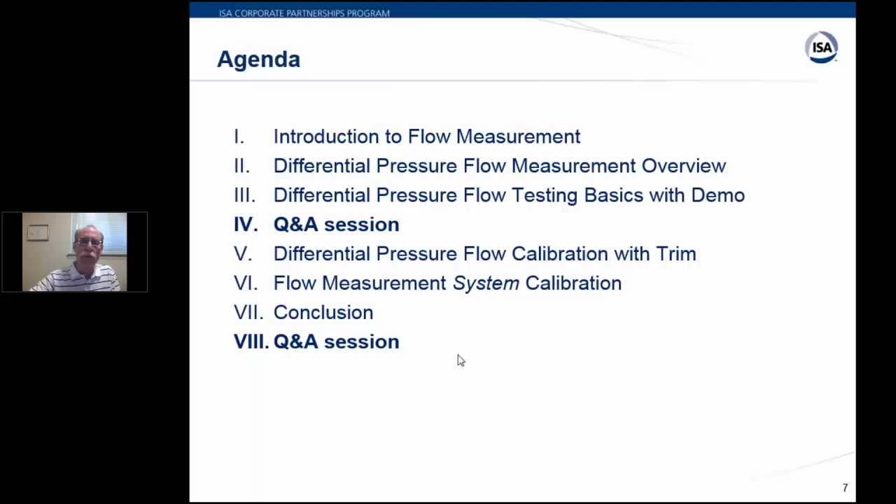So moving along here, there are different types of flow meters that are out there, and these are some of the ones that are used in industry. I've listed them in alphabetical order: differential pressure, magnetic, mass, positive displacement, thermal, turbine, ultrasonic, variable area, vortex shedding, insertion. In other words, there are a lot of them. Not all of them are used extensively in industry, but I'm going to talk about some of them.

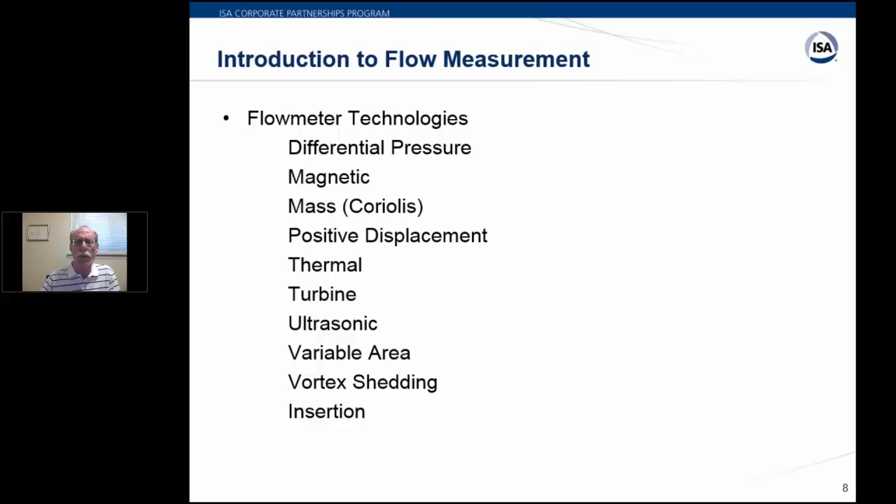And because we want to focus on differential pressure, I'm actually going to do them in reverse alphabetical order, not showing any preferences to any particular technology.

Starting at the bottom there, vortex shedding. Vortex shedding flow meters are kind of like the flagpole when you see the flag waving in the breeze, where the wind blows across the flagpole. It causes vortices to be formed.

You can see here you have flow down here. In this particular case, this is your pipe. This is a bluff body that's in the middle of the pipe, and these are the vortices that are formed downstream. Another analogy in the real world is rivers - you might see rocks in a river, and you might see vortices happening downstream of the rocks.

In a flow meter, if you double the flow through, you actually double the number of vortices that are formed. So it's a linear type of flow meter.

But here's the important thing, and I apologize, I'll say this a few times to try to get the point across: you're not just looking at the flow meter itself, what fits between the two flanges, but the flow measurement system is actually comprised of the upstream piping, the flow meter itself, electronics that hang on the side of it, and also the downstream piping as well. So just looking at one part of it really doesn't do justice to the flow meter, and you're going to see this on other flow meters as I go through them as well.

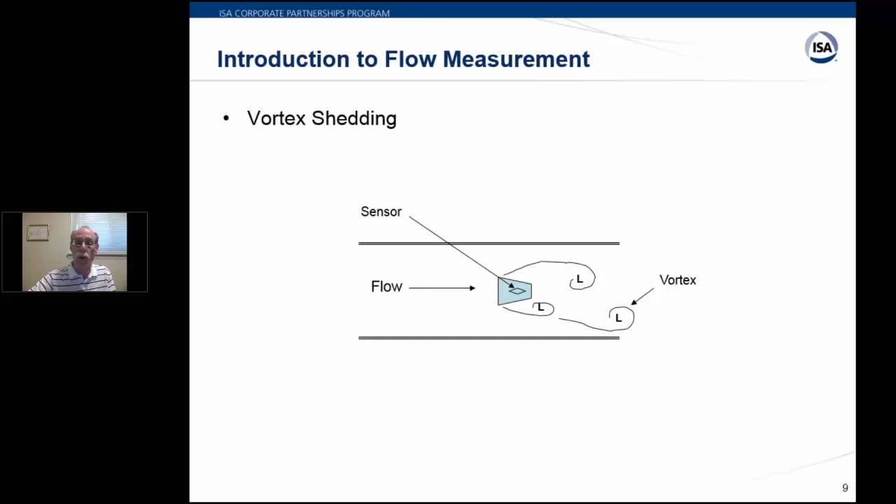So that's one type of flow meter. Another type is ultrasonic. By the way, there are variations on the vortex flow meter in a number of ways. There are variations on ultrasonic, there are variations on the other ones I'm going to talk about, and I'm not going into those at this particular time.

This shows a transit time ultrasonic flow meter. If there's no flow in the pipe, you have an ultrasonic signal that's being sent downstream by this line over here, it's received on the other side, and you figure out how much time it takes to go from one to the other. Then another signal gets sent up here, another ultrasonic pulse gets sent the other way, and you can figure out and measure what time it takes to get there.

If there's no flow, those times should be the same, and the flow will be zero. Now, if there is flow, the signal downstream will tend to be helped by the flow and get there faster. The one on the upstream side will actually tend to slow down a little bit and get there a little bit slower, so you get a time difference. The electronics then come out with what the flow measurement is, or what the velocity measurement is in the pipe.

Again, repeating what I said last time: we have to deal with the upstream straight run, we have to deal with the flow meter itself and the electronics, and we have to deal with the downstream straight run. All of those things can affect the measurement.

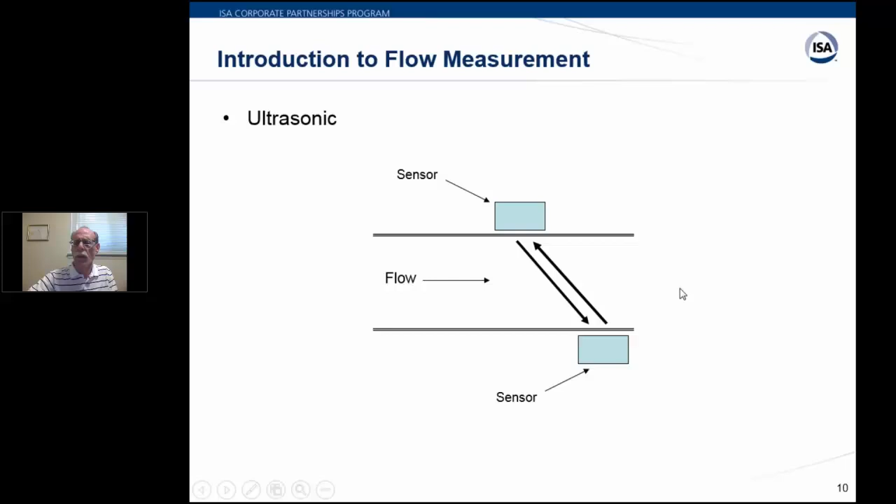Moving along to a turbine flow meter, here what we have is essentially a rotor, like a pinwheel in the breeze, like a little child's toy, but more rugged for industry. The flow comes downstream and hits these blades, and because they're twisted a little bit, they cause the rotor to rotate. A sensor, or sensor and transmitter, determines how fast the rotation is going on and determines what the flow rate is. This is a linear flow meter, so if you get double the flow, you get twice as many rotations of the rotor.

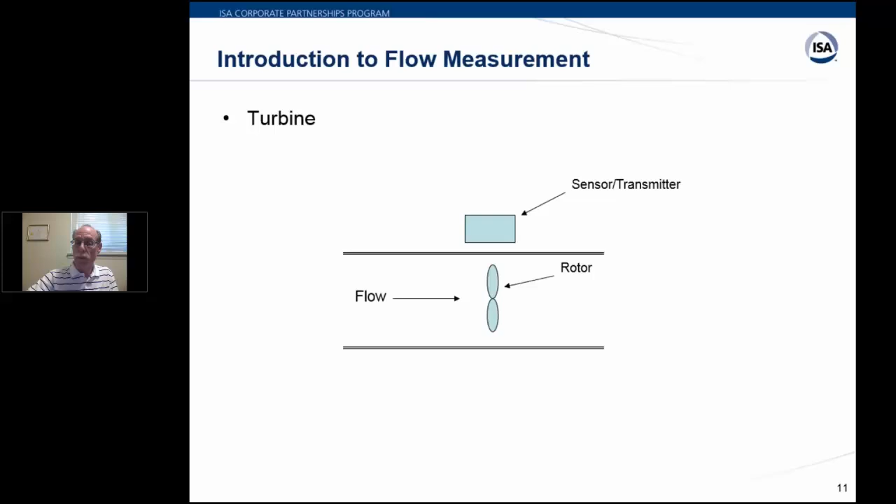So relatively straightforward, but again you have to deal with the upstream straight run, the meter itself, the electronics, and the downstream. And I offer you this: imagine if you had swirl coming into this flow meter. For example, if you have two elbows that are close coupled and out of plane with one another, you'll create swirl. If that swirl is coming in and the rotor is turning in the direction of the swirl, it wants to turn faster. If it's turning in the other direction, it wants to go slower. So you can see how that type of disturbance would tend to affect this particular type of meter.

It's just one example. Another type of meter commonly used is a Coriolis mass flow meter. Here it's measuring the mass. It's not shown here, but in most of these meters the flow actually splits into two tubes, goes around the tube, and then back out the other side and up and out of the meter. The tubes vibrate, and because of the mass moving away from the center of vibration, you get an acceleration. The acceleration and the associated force is in one direction on this side and another direction on that side, and the tube will actually twist. There's a little experiment you can do in your backyard with a garden hose, doing essentially the same thing - hanging it down in a U shape, swinging it back and forth, and turning on the water. You'll see the twist very strongly.

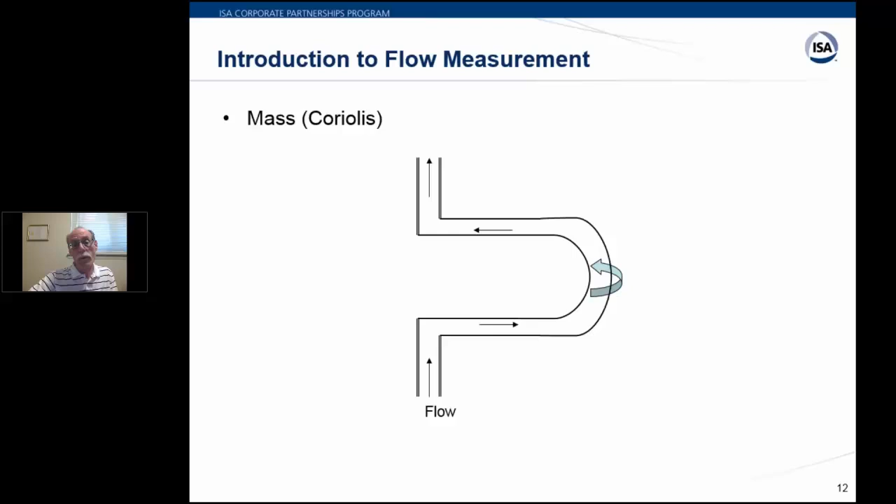Now this particular meter is a mass flow meter, and it splits the flow. It's really kind of insensitive to what happens on the upstream and downstream. However, if you have jetting or something like that where more flow goes through one tube than the other, that probably can cause a problem. It may be an issue, and if it's really extensive, maybe it causes the meter not to even function. So you still have these issues, just not as much as the other ones I mentioned.

Moving along here, magnetic flow meters. This shows a magnetic flow meter diagrammatically, where you have an insulating, non-conductive liner and a magnetic field that's being put across the flow. The liquid has to be conductive, and by pushing the flow through the magnetic field, you create a small micro voltage at these two electrodes, which is then determined. From that you can determine what the flow is. This is a linear type of flow meter.

You double the flow, you get twice as many microvolts across the electrode.

Now, one practical consideration you may see in these diagrams: the electrode shown on the top and shown on the bottom. If you're actually installing a meter, you don't do that. Why not? If you install it on the bottom, it can pick up dirt and things like that, which isn't good. And if you install it on top, there could be an air bubble or gas bubble that causes you to lose your circuit and not get a good reading. So if you were really doing this, the electrodes would be in the horizontal plane so you didn't have any of those issues. But these are diagrams, and you can't really show it the way it should be and explain it properly.

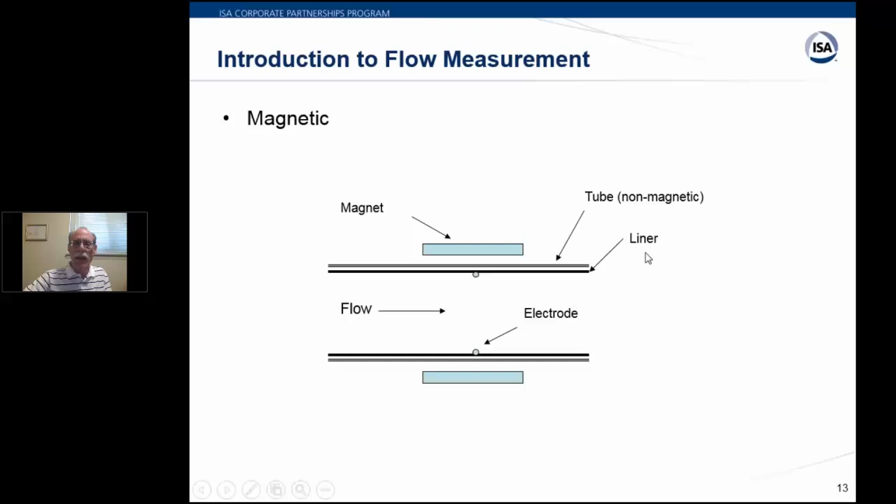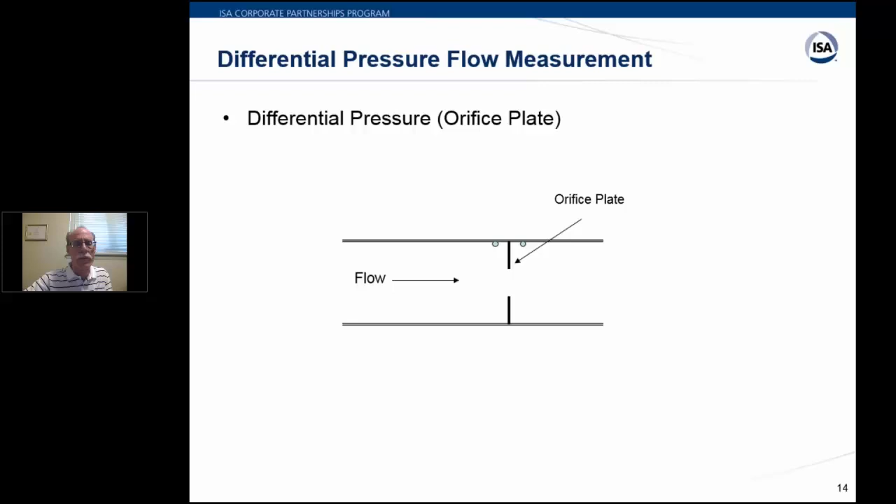Again, same thing - I apologize for being repetitious. You have to deal with the upstream piping, the downstream piping, and the orifice plate itself, the installation, and also the tubing, not shown here, going to the transmitter. That has to be set up properly as well. So a lot of things - these are flow measurement systems, not just flow meters: flow element, flow transmitter. It's really a system.

This is a different geometry called a venturi. It would normally be smooth here, but my drawing skills are kind of limited. Here you see the upstream pressure, and the throat over here is the downstream pressure. So that's the differential pressure you're looking at. These type of meters generally have a lower pressure differential across them than the orifice plate you saw before, which was kind of a real sharp cut of the flow. This is more of a smoother transition in and a smoother transition out.

To give you an idea of why you might do this, it takes energy - pressure drop is energy in a lot of applications. There was one project I was working on some time ago where we had a 180-inch venturi, which was many thousands of horsepower. We were pushing water through that venturi, and taking a large pressure drop such as would be with an orifice plate was just out of the question. You couldn't do it, you couldn't afford to operate - it would be very expensive. So this gives you an idea of a venturi.

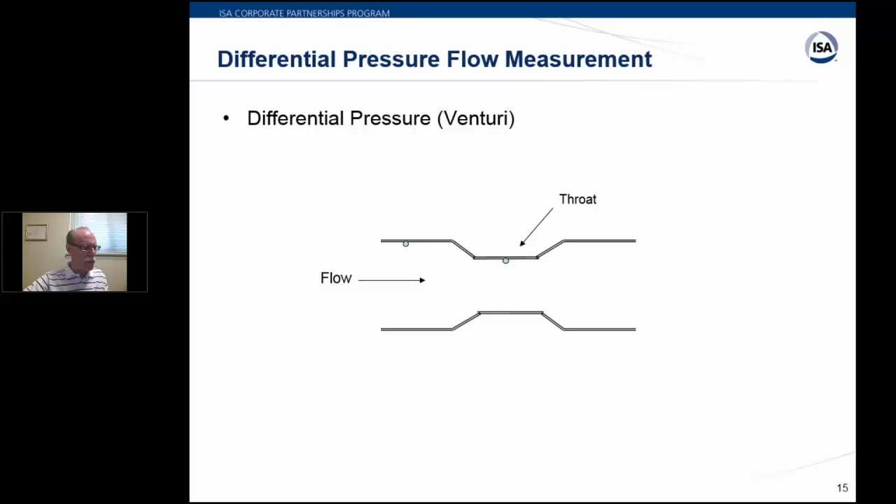Let's see here, moving right along. Kind of a poor man's venturi in a way is a flow nozzle. This is basically a curve that you see here, going all the way around the pipe. You can think of it as an orifice plate where the hole is kind of bent, if you will. The flow comes in and makes its way across here. It has a higher pressure drop than a venturi, but a much lower pressure drop than an orifice plate. This is oftentimes used in steam service.

And again, you have to deal with the upstream straight run, the downstream straight run, and also the condition of the nozzle. Just as a side point, some years ago I was involved with a legal case that involved some nozzles, and I was not able to actually look at the nozzle itself, the internals. And that posed - why not?

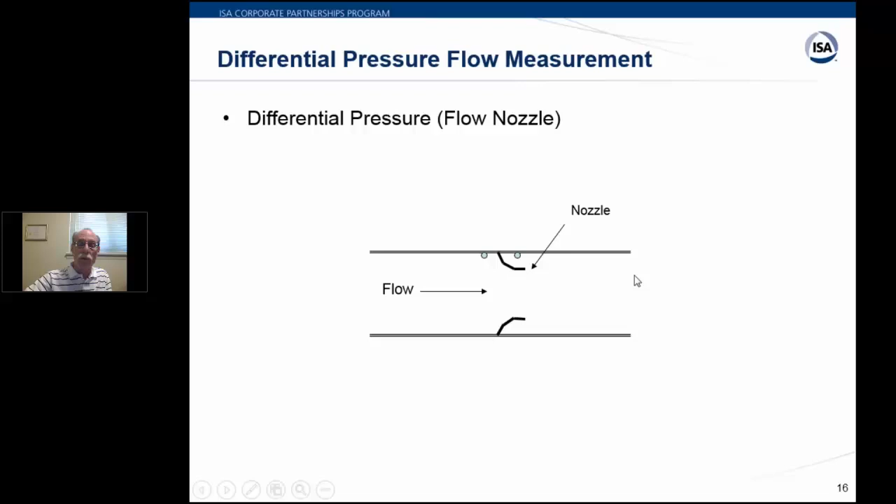Well, it was in steam service at 800 degrees, 800 psi and 800 degrees Fahrenheit, and it had not been taken out in something like 45 or 50 years. Nobody had looked at it. And the transmitters were not that much better off. They had not been calibrated in 7 years because they had mercury in them and nobody would touch them anymore. So I had to actually take a look at this and prove and show, with logic and reason and science, that these meters were actually functioning correctly. So there were other techniques that I used to do that. But, you get an idea of things that you have to consider.

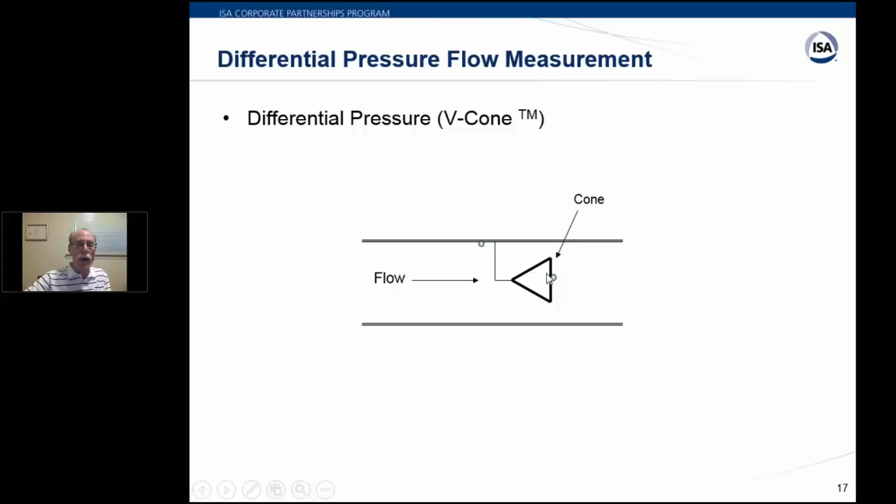This is another shape. It's actually a trademark, a V-cone, which is from McCrometer. Here you've got the flow coming in. There's your upstream tap. And the flow goes around this triangular piece there. It's hollow in the middle, but to the flow stream it sees it as a triangle. And the flow goes through this annular area here, and then the pressure drop is from here over to the upstream tap. So these are just different geometries. There are others as well, and variations on these. So there's quite a lot to it if you so desire.

Now, that being said, some of the common threads I've gone through here are that when you measure flow, you're really looking at a flow measurement system, not a flow element, not a flow transmitter, not some piping. You're looking at everything, the whole thing, in order to be accurate. So here what you have is the upstream straight run that you have to deal with, the flow meter element itself, or this plate or whatever you're using, the differential pressure transmitter, which we're going to talk about more today -- Ned and Roy are going to talk about that -- and also the downstream straight run. And here's key: all the components must be considered to ensure accuracy.

I want to add a little side note. I mentioned that 180-inch venturi. In that particular installation, a tie-in was made with a bypass line. Now catch this, upstream of the upstream straight run -- so upstream of the upstream straight run. It was really kind of far away. But when they turned that bypass on, it affected the flow measurement by 10%. Even though we had not played with the upstream straight run, and there was some piping between where the tie-in was and the upstream straight run, it still affected the flow measurement by 10%. And it was well documented that that was the case.

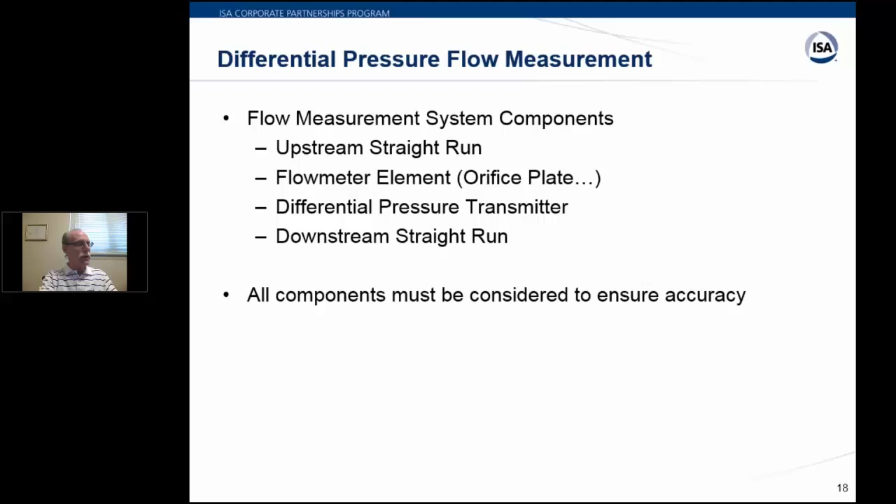So with that, one more slide. What I wanted to say with differential pressure flow measurement is the flow rate is proportional to the square root of the differential pressure produced. Now, what I do is I just memorize one thing to remember that: double the flow, 4 times the differential. So if you have double the flow, 4 times the differential; triple the flow, 9 times the differential; half the flow, 1/4 the differential. So 1/3 of the flow, 1/9 the differential. 1/10 of the flow, 10% flow, 1/100th of the differential. And Ned is going to talk some more about issues concerned with that particular aspect of it.

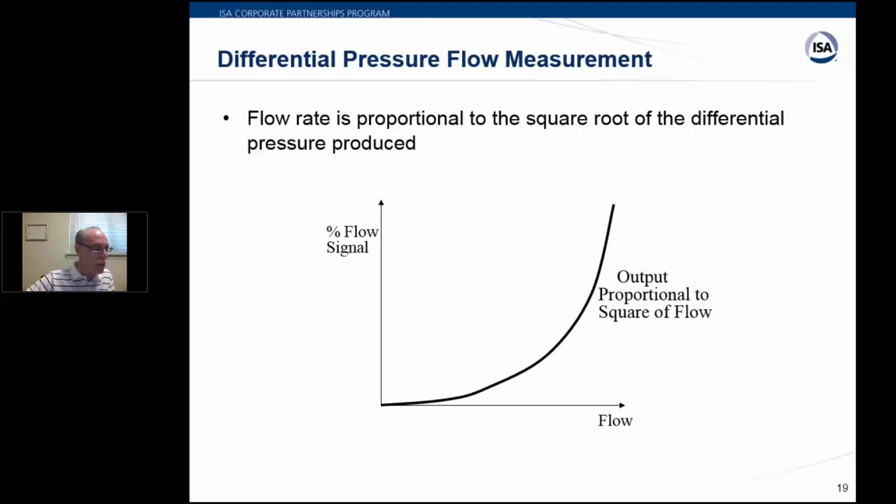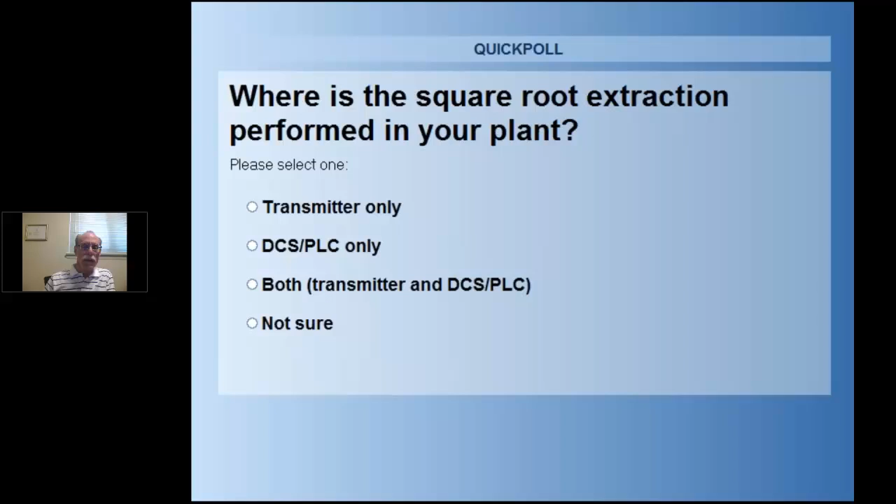So what I want you to do here is we have a little survey question. Where do you take the square root extraction? Do you take it in the transmitter, the DCS, the PLC, or both of them? Not sure -- and no one's looking over your shoulder to see the answers. There is no really right answer, but there certainly is a wrong answer. And the wrong answer is if you do it both at the transmitter and in the DCS or your PLC, because then you're not taking the square root, you're taking the fourth root essentially -- the square root twice.

So what I'd like to do is, for all the questions, I want you to put down what you do. And I see the results here. You can also see about half of you do it in the transmitter only, half of you do it in the DCS or PLC. And these two, you can make arguments for either one -- neither one is incorrect, they're both correct. But when you do it in both of them, that's about 20% of people. I guess this follows the 80-20 rule. If you do it in both of them, that can pose a problem because you're not going to get the correct measurement.

As a side note, some years ago I actually did it in both in one particular application, because it looked like it was not being done in the other location, so I did it. Then I found out it actually was being done, so I undid it. We ended up correct, but you can sometimes stumble into something because it's a setup for you.

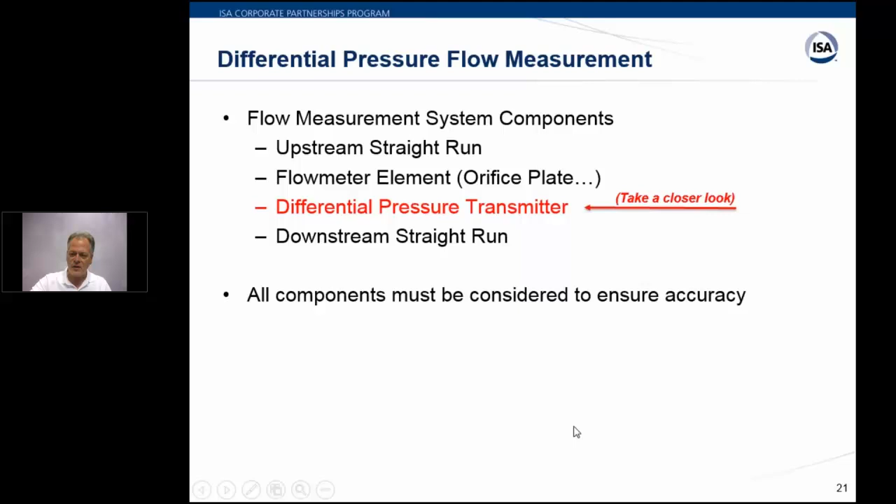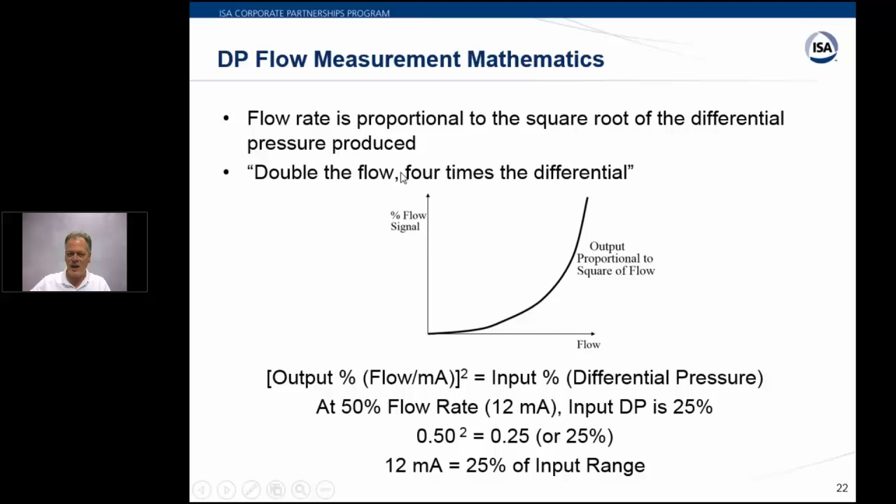Let's look at this low range. A lot of people use the term low flow cutoff. Typically in the DCS, when the meter drops below 5.6 milliamps, which is 10% flow rate, it just assumes the flow becomes zero, because look how fast it changes. As you start at 0, it runs to 5, 5.6 milliamps very quickly with just a very small change in pressure.

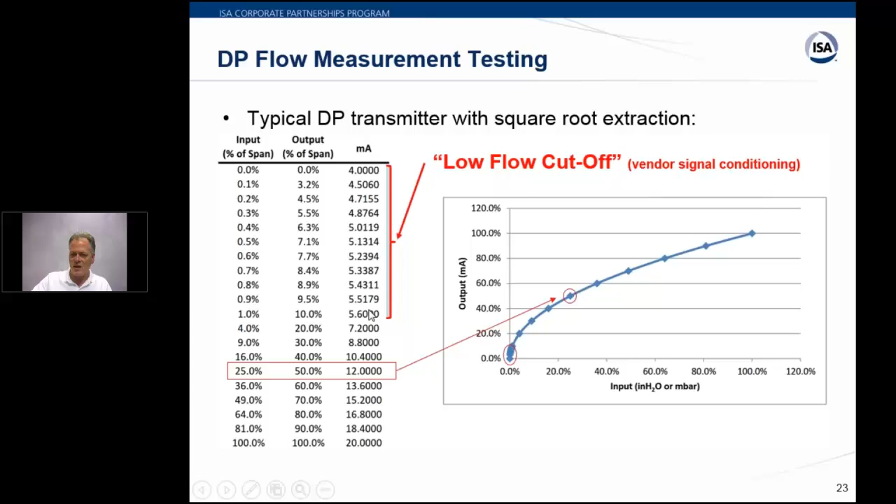So you can see, as Dave mentioned, just a 1% change in the pressure causes the output to move 10%. So when you're looking at a transmitter, this is very difficult to work with. And if your DCS is cutting this signal off anyway, it's wasted effort to test below this level. So Roy is going to be demonstrating that. Roy, if you come in here, let's see if we can show this to the audience.

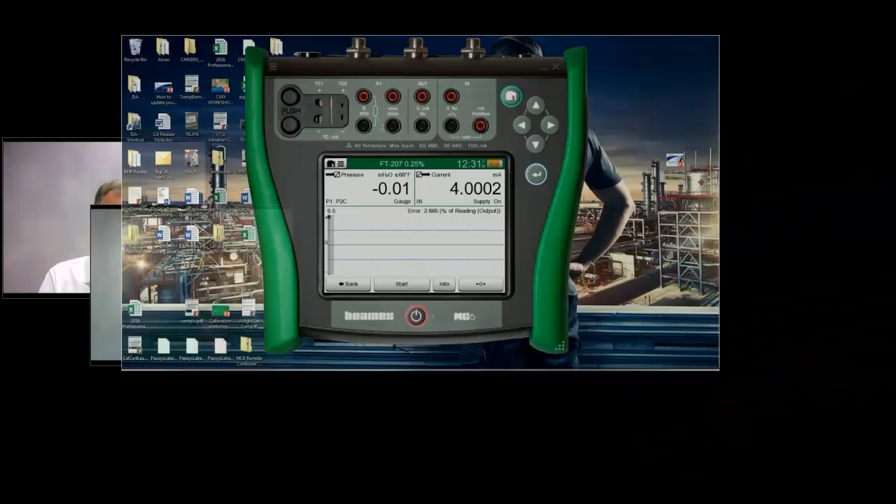All right, sure thing. So just so everybody knows what I'm using here, I've got a calibrator and I have a differential pressure transmitter. I wanted you to see that I'm actually using real gear - I don't have a simulator going on. Once I hit this, now you can actually see my screen. You should be able to see the MC6 itself. What I'll do is I'll show you...

I'm sorry, hello? Yeah, I'm on a webinar right now. I'm on it. Yeah, can I call you back? All right, cosine is adjacent over hypotenuse. All right, I got to go. I love you too. All right, bye. I'm really sorry, that was my mom.

What we want to show is the transmitter itself. Since it's square root, we want to stay away from zero. I have a pressure pump here. Let me go ahead and start adding some pressure. You might notice that when I'm at zero, let me take it off of a vacuum. When I'm at zero, I'm actually seeing a cutoff—I'm seeing 4 milliamps out.

But if I pull this up to what Ned was saying, to just 1% of my input—1% of 207 inches, which is my span, is 2.07 inches—so if I get close to that, now I'm seeing about 5.6 milliamps, and this is where we want to start the test of our pressure transmitter.

That's the whole point of what Ned is saying here: if I go back and don't hit this 1%, you're going to see this thing jumping all over the place. Actually, it's even off the graph now, jumping around—it's off the screen on the error, so it's just meaningless.

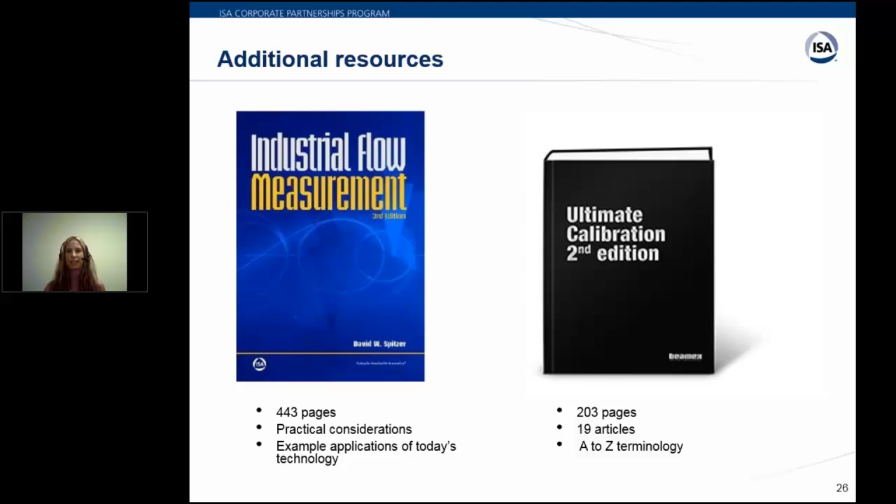All right, Roy, thanks a lot. So now we're going to get down a little bit deeper. We just showed you the noise at the low end, and let's get a little more specific on how we recommend you should test a DP flow transmitter.

If you're a calibration professional, you're used to testing at 0, 25, 50, 75, and 100%. And when everything's linear, you don't even think about it. But remember our slides, we're dealing with square root mathematics. Since we're trying to measure flow, it makes sense to focus on the milliamp output.

So you really should be testing at 25% of flow rate, 50%, 75, and 100. Also, we brought in this concept of the low flow cutoff. So instead of testing at 0, we're recommending you test at 10% of output—5.6 milliamps, then 8, then 12, 16, and 20. It's a little different than what you're used to on a linear transmitter.

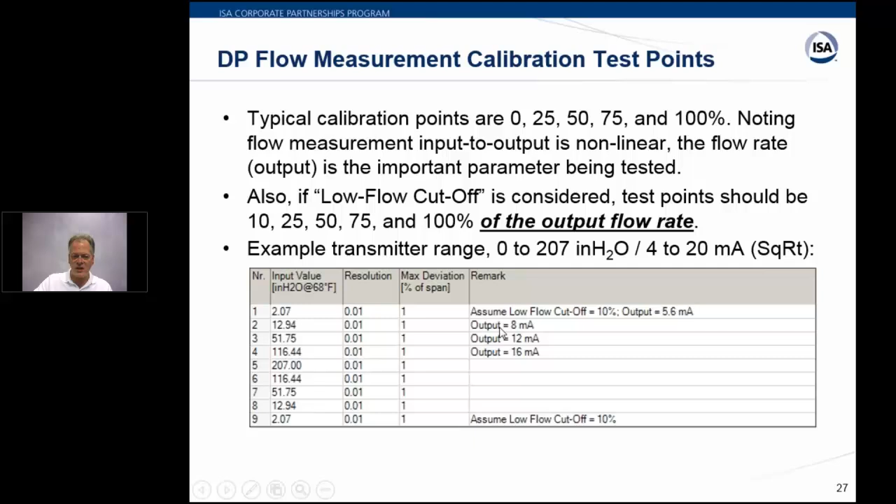So here's what I'm talking about: we're checking at 10%, then 8 milliamps, 12 milliamps, 16 milliamps. We've backed into, in essence, the pressure required for those test points. The pressures are very odd with this range of transmitter, but if you dial in these pressures, you're going to see nice, even milliamps.

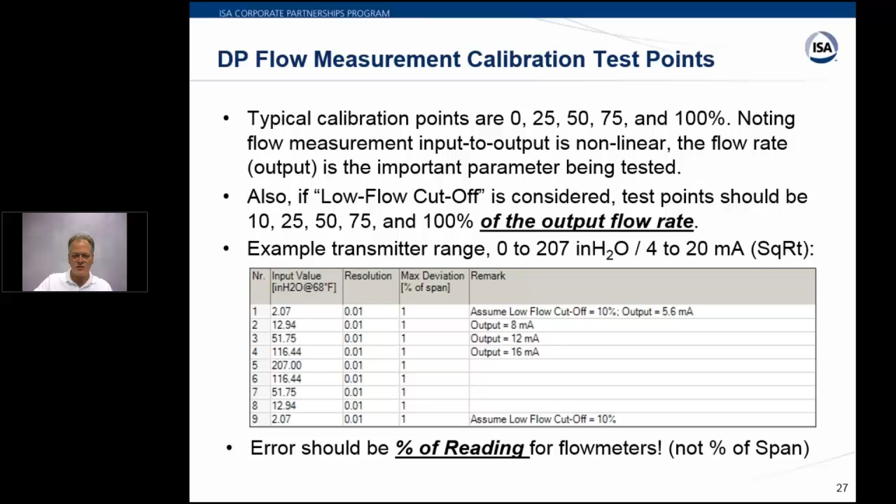And then finally, when you look at the error, people are used to using percent of span. But for flow, we recommend you use a percent of reading type analysis, not percent of span.

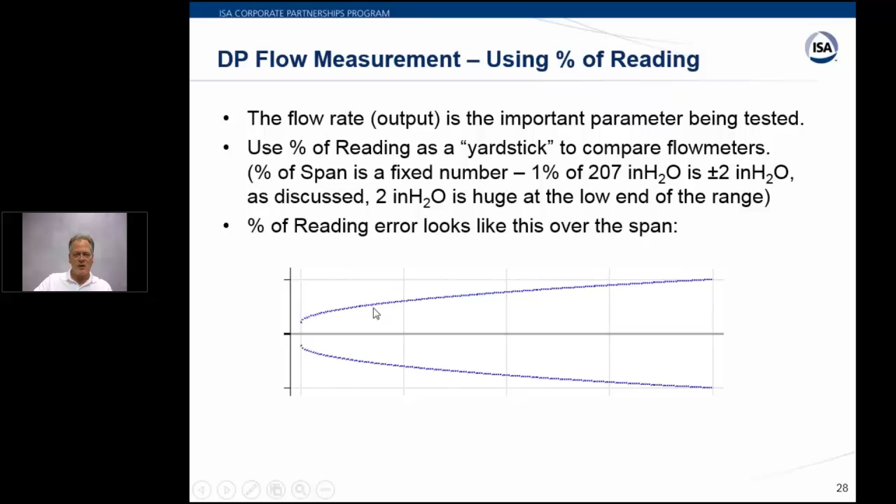So to summarize, you need to understand the math—that the differential pressure is going to be the square of the milliamp range. Consider that there's low flow cutoff going on, and it's really a waste of time, or just not good data, to test below 10% of the flow or 1% of the pressure range of the transmitter.

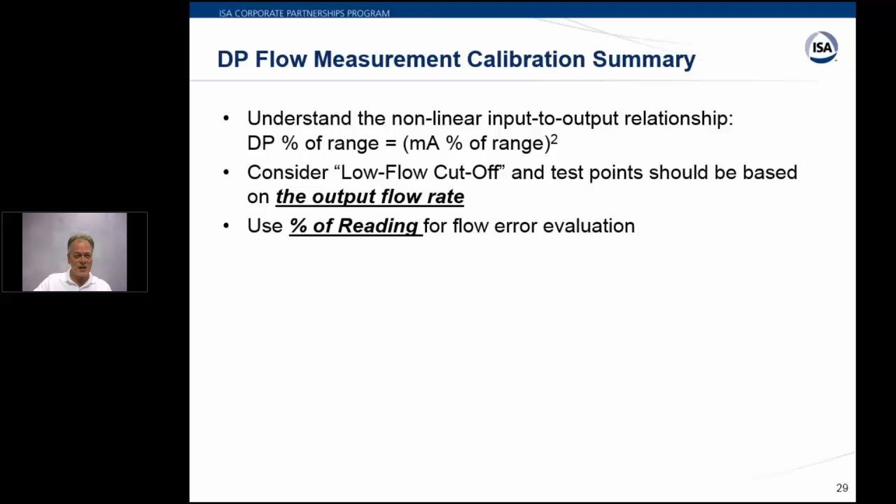So with that, I'm going to turn it over to Roy and let him show you what I'm talking about.

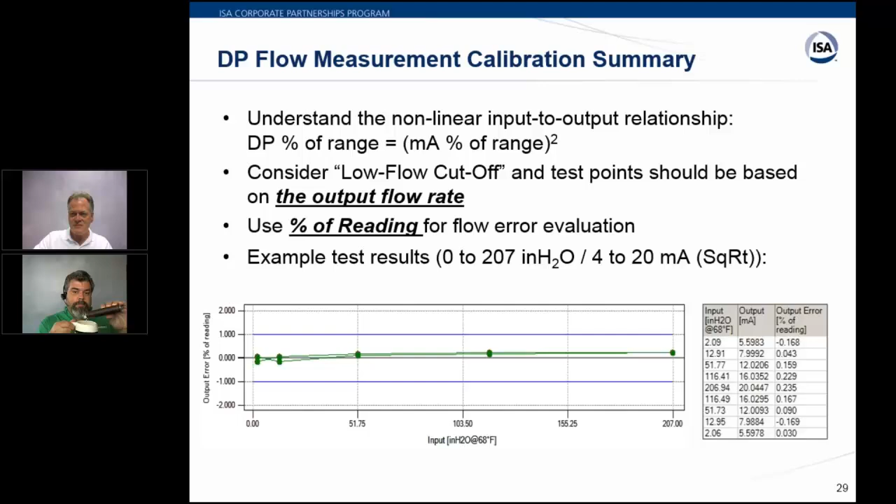Yeah, just a minute. Don't turn my video on yet. My camera, what? Hey, this is not what it looks like, I am telling you. Let me get my calibrate—just, I don't want to spill. Roy, we talked about that.

Yeah, sorry. So we're going to calibrate a DP, differential pressure transmitter. We wanted to do a 5 up-down test strategy, but for the sake of time, it's not enough, so we're doing a 5 up by itself.

On the calibrator, my first test point is 1% of my span. So 207—you just move the decimal point 2 places over, and we have 2.07. Let me hit start here. I have a 2-second delay, which is pretty quick.

My next test point for 25% is right here in the gray, and I can use my fine-tuning knob if I want, or just get into the gray area. Look on the bottom right—that's where I'm supposed to be.

So now for 12 milliamp output, and so the flow output, because we're calibrating the transmitter itself, we have to deal with the output of the transmitter, which is 4 to 20 milliamps.

I've converted my... I actually jumped past it too quick. Let me go ahead and vent this and approach it again from the bottom. I don't want to vent down onto it. Let me just back down. Here we go. Otherwise I'll erase any hysteresis that was in there, so I'll approach it from the bottom.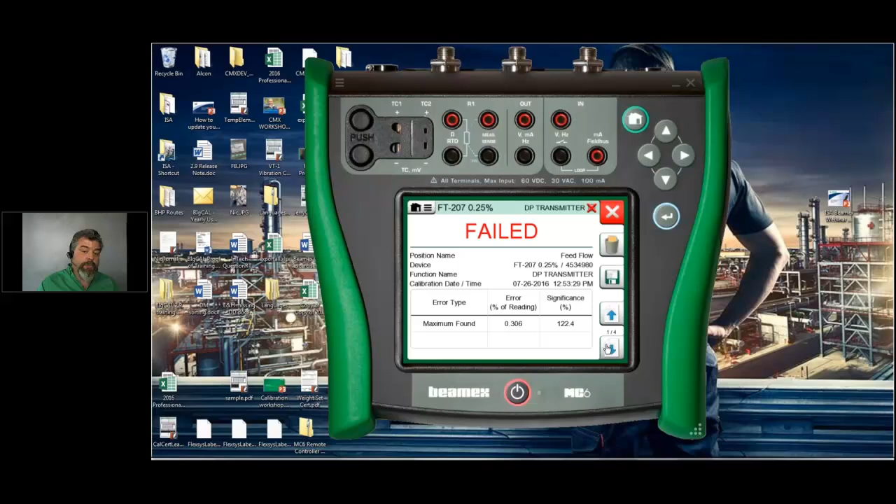This thing failed, and I'll use the mouse so you can see where I'm clicking, but you know that I'm using an actual calibrator, and your calibrator might be a different color as well. As long as it can do a calculation of that input and a square root calculation against the output, then you can do this test.

I can put in notes here, so let me put notes. You know what, I'm not going to put a note here on this as found.

Here's my graph. The blue lines represent the tolerance. So the 0 across the middle is perfect, and we can see that our very first test point failed.

I want to see the numbers. Okay, here we go. My very first one was 0.306% of reading out. Everything else was in tolerance, but I need to do an adjustment.

Now, as a tech, do I delete this and trim it and not tell anyone? No. You want to save this as ugly as it is, because this will give you trending information. So let me save this. I want to save it as found.

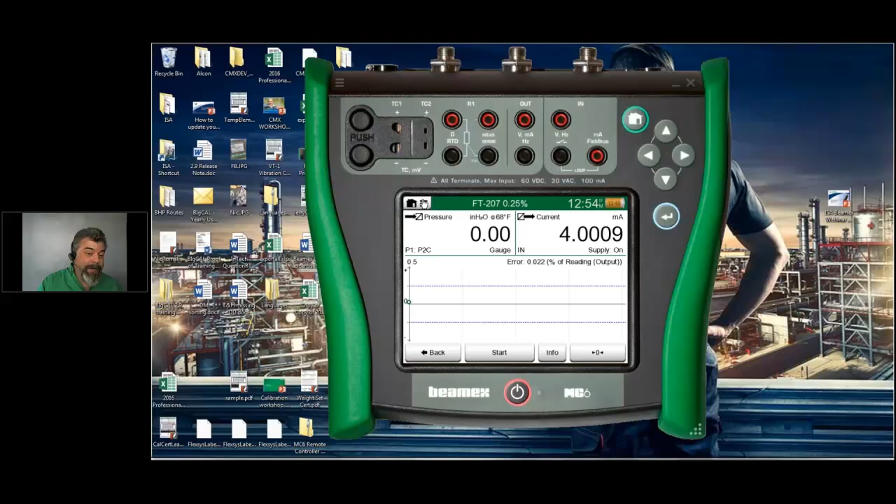Now I'm back to the beginning. Let me vent off my pressure pump, and I need to hit the secret button. There's a secret button on this calibrator, and it's right here in the top left, and don't tell anybody.

Secret button, start communicator. It actually has an official name, which is menu button, but I like secret button way better. We're starting the HART communicator. This is a HART transmitter. If this were Fieldbus or Profibus, it would be exactly the same thing. Just start the communicator, because we can't do an adjustment with a screwdriver or a crescent wrench. If it's a smart device, we have to fire up the communicator and do the adjustments that way.

So this does take a little bit of time to connect, and it always takes longer when people are watching you. I don't know why that is.

So here it is. Let me click online, and this it is a Rosemount 3051C, so that'll be under Service Tools, then I want Maintenance, and if your transmitter is a different color, this menu structure will be different also. So here's Analog Calibration. That's the digital to analog adjustment on the output of the transmitter.

What I want to do is look at the input side, so we'll go to Pressure Calibration, and you see upper, lower, and zero. Zero we don't want to do here. Zero is what you do when you install the transmitter. But I want to run the lower method. I always run the lower first and then the upper.

Warning: loop should be removed from automatic control. It is. It's sitting on my desk, so it's not being controlled.

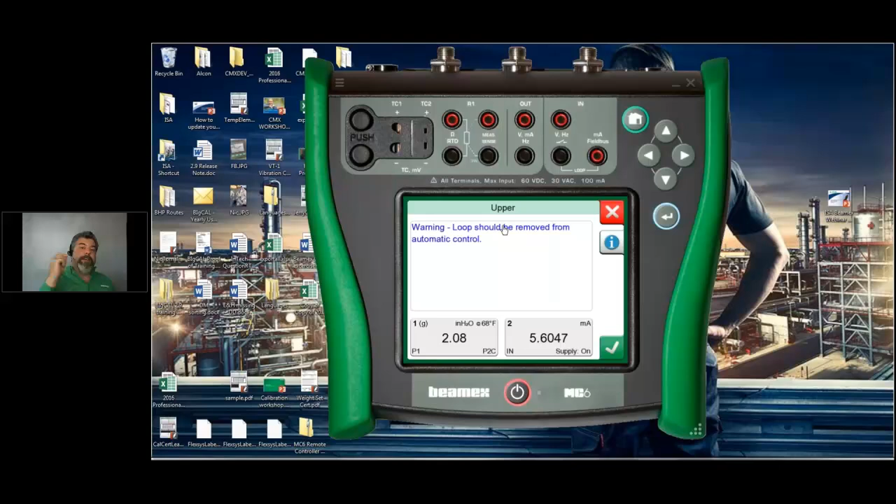We need to go to upper. Let me hit check. So to back up a second, we're adjusting the lower range of this transmitter and the upper range. We're adjusting these individually. I just trimmed the lower, and now we need to make an adjustment on the upper so we have this range of 0 to 207 inches. Let me hit check here. So now it says apply pressure, and I'll hit check, fine.

And let me take this up to 207. Should I make it look like this is more difficult, or just, no? Okay, so we're coming up. I can do the rest of it through the fine-tune knob.

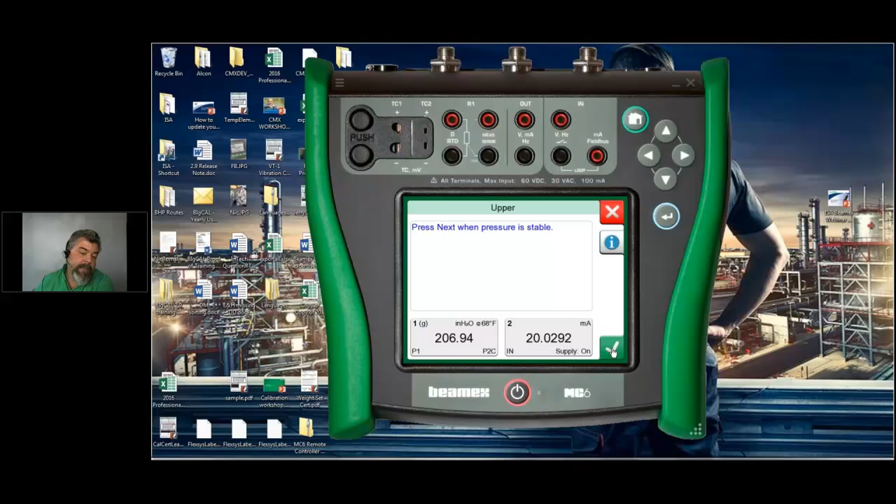Again, let me just set this down because I don't want my hands to shake or move the pressure hose to have an adverse effect. So I'm letting it sit here. It's coming down a little bit, and I'm watching this. It'll take a little bit to stabilize, and I may even rush this for the sake of time. But let me just pull it up again here. I know that I've already tested this - if I let it sit there for a minute or maybe even a couple minutes, it'll sit rock solid and I won't have to worry about the pressure falling.

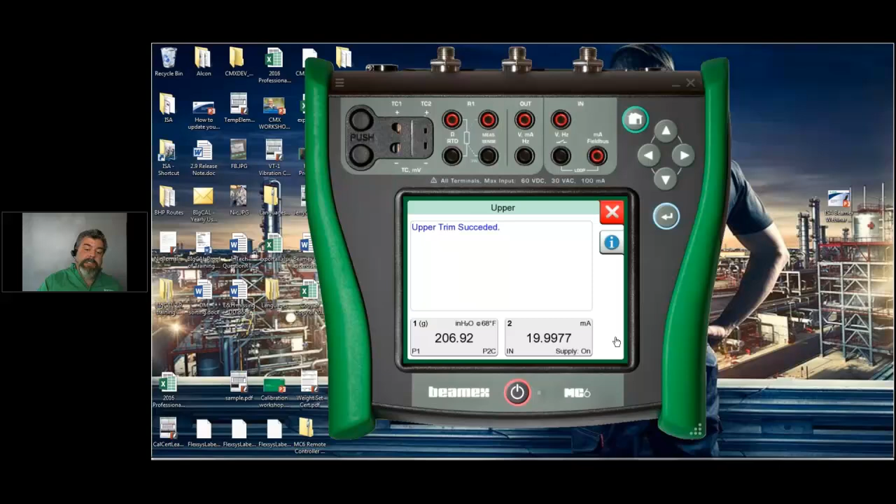But you know the deal if you're in a hurry, so I'm going to force it right here. Grab this, tell it I'm putting in 207. You should watch the output. So it was 20.03 and now it's readjusted itself to 20 milliamps. We're pretty darn close. So it says remove pressure. Let me hit check. Upper trim succeeded. Now it's finishing up the processing on the transmitter itself, and now it's done. Wow, that was quick. So let me hit X.

What have we done? We've just done a lower trim at our 2.07 and our upper trim at 207. So now we should see - you can see our test point right now on the right side. Our span on the top is actually great. Let me just vent the pump.

And before I hit start, you can see it's jumping all over the place. That's part of why we don't even try anything lower than 1% on the input. So I'll close the vent on my pump, and let me take this up to 2.07 as a starting point.

Do I have to get it exactly on 2.07? No, because we're calculating the output against right now 2.17 or 2.18, so we don't have to get it exact. It'll calculate. Let me hit start. And I have a 2-second delay. All right, I've already grabbed that one. Now I'll put it in the next one.

So what's our next test point? How do we know? The bottom right says 12.94, so I'm looking for 12.94 inches of water. I'm going to not get it exact. All right, I went over a little bit, but I'm still in that gray bar, which is 4% of our target. And we're calculating what our output is - so now we're 8 milliamps out. I'll take it up to 51.75, and I'm just going to get it close.

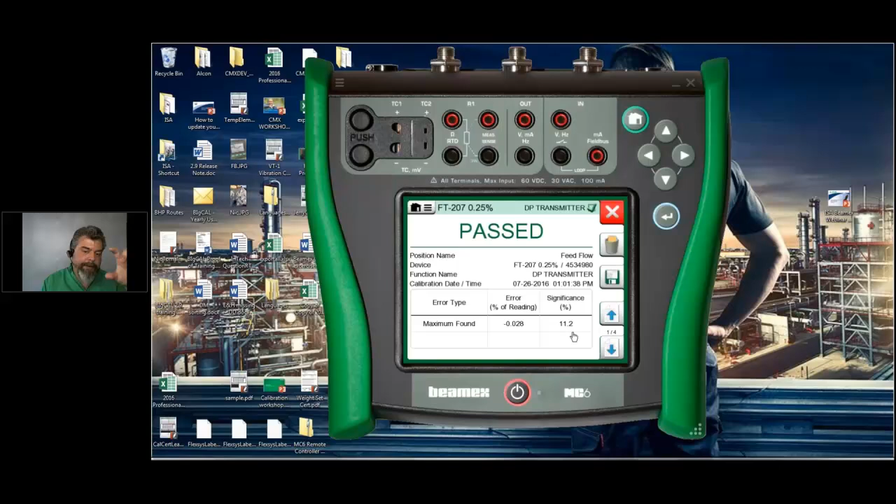So as a reminder, we're doing a trim on this transmitter, and I'm not getting it exactly on 207 because I don't have to. I'll get it close, I'll let it do the math. What do I have? Passed. My largest error was negative 0.028% of reading, which is 11% of our full target allowed, 11% of our 0.25%.

So the notes, I'm just going to put in a note. I'm going to say trimmed. And wait, no, I'm not done yet. Let me hit enter, trimmed. I want a dash. It's always when you're in a hurry you can't find it.

So this is the technician putting this in. This is not me.

Okay, so this is the note that will appear on the calibration certificate. And remember, I did not put that. That was the technician. Here's how we left it, and the numbers. So we don't have to type this down as long as you have a documenting calibrator. That's the whole key. Let me hit save, and I'll save it as left.

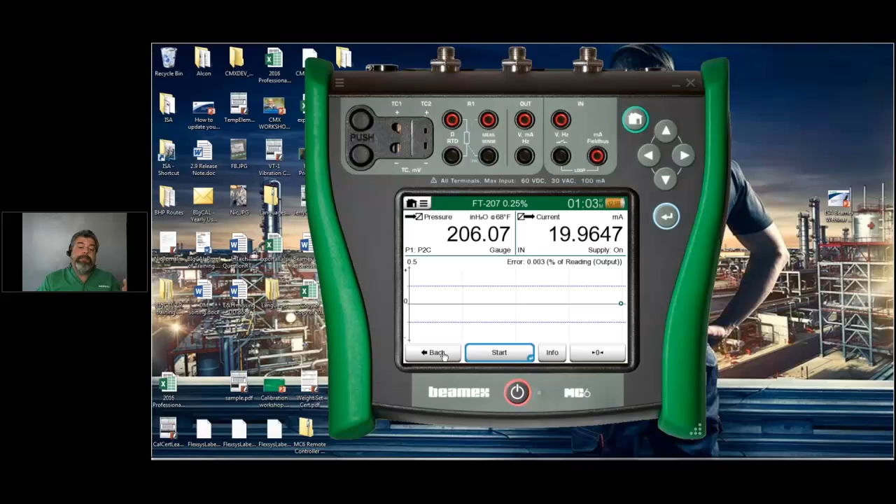Now I'm actually done, but let me hit the back button and show you the before and after. Let me go down to the results. This is how we left it, but if I want to see what it looked like before, let me do show older result. This is the very first result.

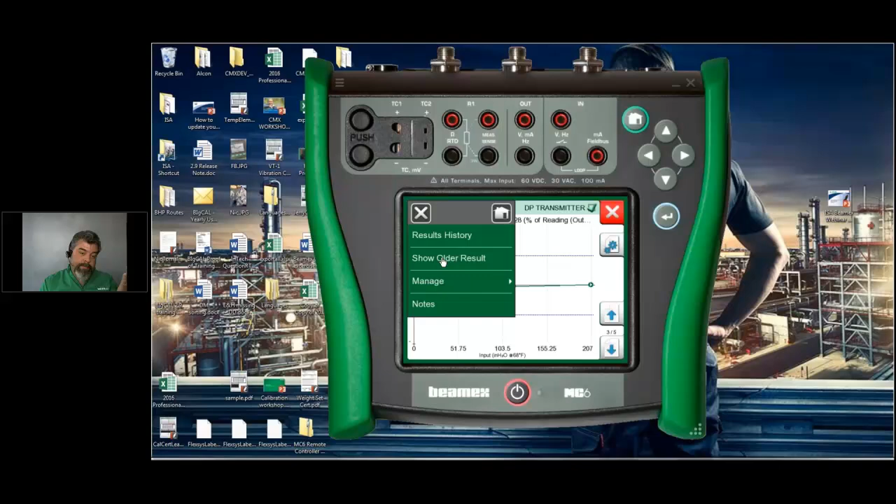I'll go back up to the secret button, show newer result. That's how we left it. One more time. Here's how we found it, and there's how we left it.

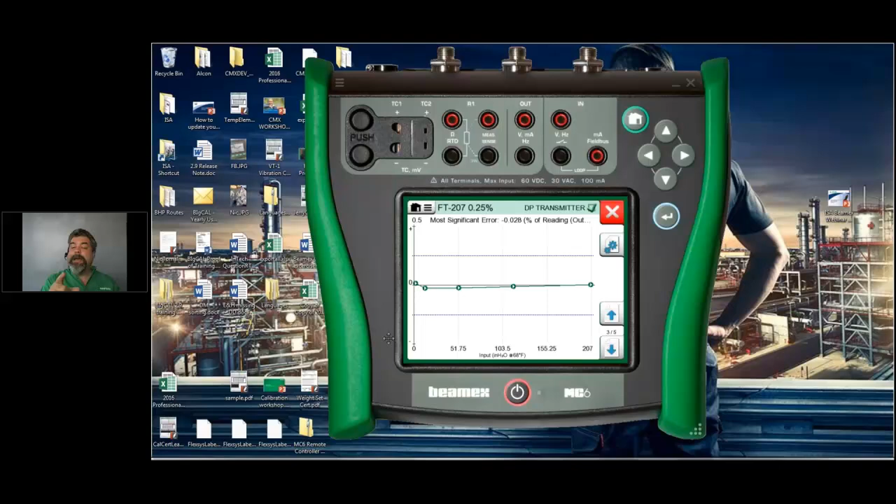So this, I've just done this really quick. This is how you calibrate a pressure transmitter. But David is going to show you coming up that this is not all there is to flow issues. There might be other items in the process that can affect it, and David will show you that, but I'm just showing you how to calibrate the transmitter itself. So with that, I'm going to hand it off.

Okay. Okay, very good. Thank you, Roy.

Let me continue on here, and again, I apologize that I'm repeating myself, and I'm going to read to some degree, my apologies there. But the accuracy of a flow measurement system is based on the entire flow measurement system, which includes the straight run, flow element, and the transmitter. All of these things have to be operating properly and done properly in order for the system to operate properly.

And now the flow measurement system, think about that for a second. If you want to calibrate the entire flow measurement system, you should be calibrating the entire measurement system. Okay, so a calibration really is a calibration of the entire system.

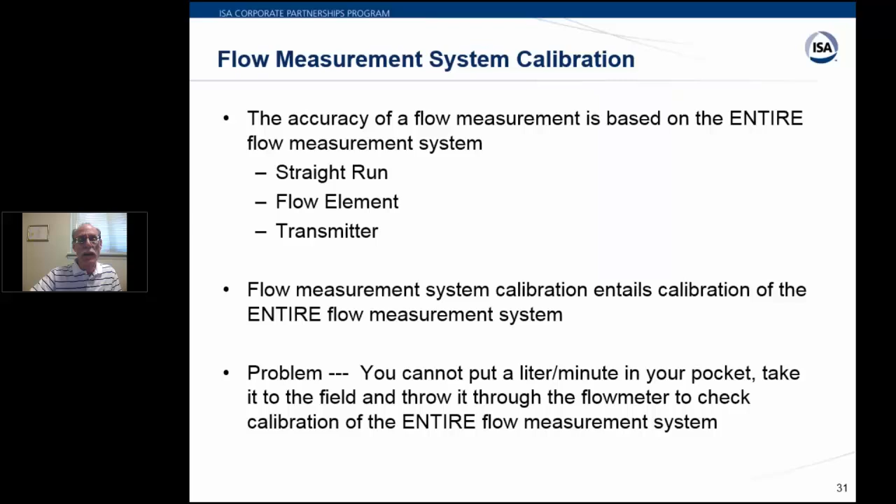The problem is you can't take a liter per minute, or if you're in the United States, a gallon per minute, of liquid or gas, and put it in your pocket, take it out to the field, throw it through the flow meter, and check and see that the flow meter read 1 liter per minute. Flow measurement is a dynamic measurement. It's not a static one like pressure, temperature, or level. It's dynamic, in liters per minute, cubic feet per minute, gallons per minute, whatever it is. There's time and there's a mass or a volume associated with it. So that's why flow measurement can become a bit of a problem.

I have a question for you here. You can just answer yes or no, no right or wrong on this. Do you know what a flow laboratory is? Basically, as you're answering, I'll talk to that. A flow laboratory is a facility where it is able to measure the flow going through a meter under test, the meter that you want to know if it's okay or not, very accurately. When you're talking very accurately, it might be 0.05%, 0.1%.

Okay, so 2/3 of you know what a flow laboratory is. That's good, that's great. I'm not picking on the 37% here, but a lot of people out there in the industry have never heard of that before.

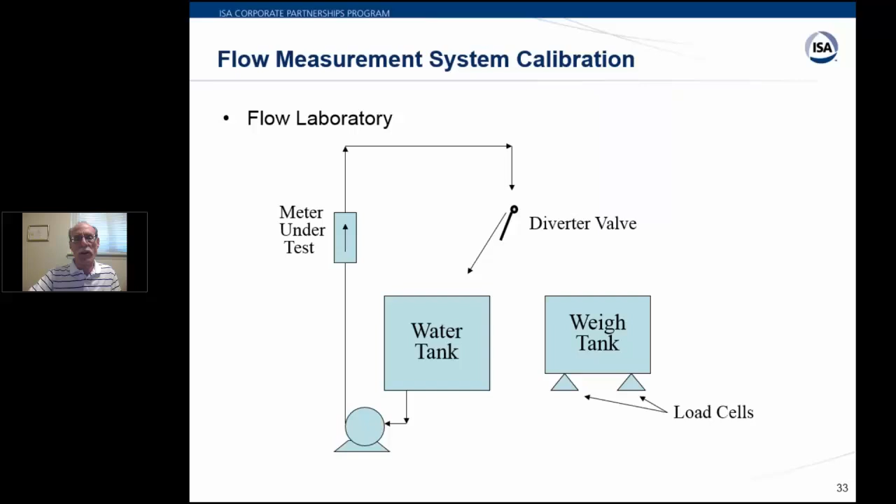If you run a slow flow into here and try to fill up the tank, it can take an hour to fill that thing up. So you end up tying up this facility for quite some time if you try to actually run production meters on this.

Now, at the end of the week, and I'm making up a week, it may be less time, you can take this master meter, recheck it in the flow laboratory, and find out that it has not shifted at all, in which case your production meters can go out the door and get shipped. Okay? Now, how does this thing work? The master meter is basically, okay, it's a master. You set up the flow to be, and I'm going to make up a number, 100 liters a minute.

You set it up to be 100 liters a minute in a circle, perhaps with a variable speed drive on the pump, and you look to see that this meter is reading 100 liters a minute. If it's reading 103 liters a minute, you can make an adjustment to the meter under test to make it read 100, because that's what's really flowing through the system. The advantage of this is that with a variable speed drive, you don't have to manipulate valves or play games, you just change the speed and you can change the flow. So in just a few minutes, you can get 3, 4, 5, 7, or 9-point calibrations in a relatively short period of time, without having to empty and fill the tanks like in the other system I mentioned before.

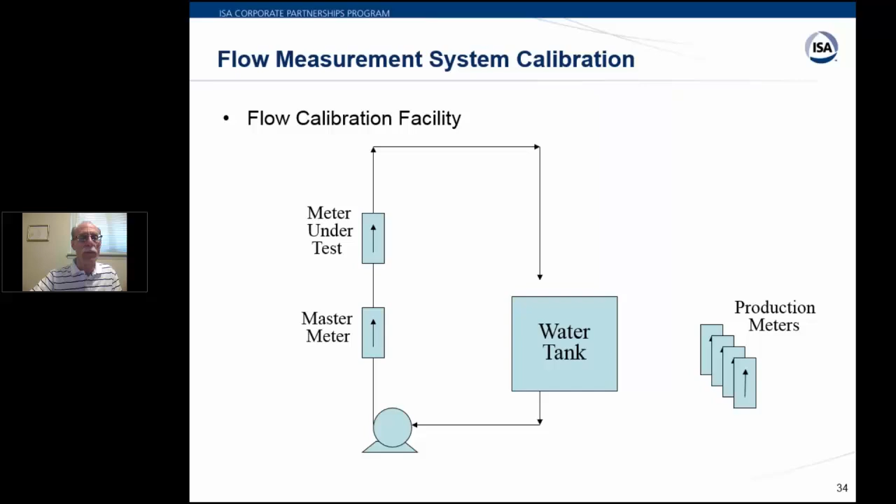This is something you can actually do in your plant. In our plant, when we had the small one, our water tank was actually a 55-gallon drum, which in a chemical plant, there are a lot of those around. We used a drum pump and got a master meter, and kind of set all this stuff up. I wasn't the one that did it, but my predecessor at the plant did. What I did later on was make this a bit more permanent with more piping and real tanks, as opposed to a 55-gallon drum. But this is something practical that you can do for meters under approximately 3 inches in size, to give you an idea.

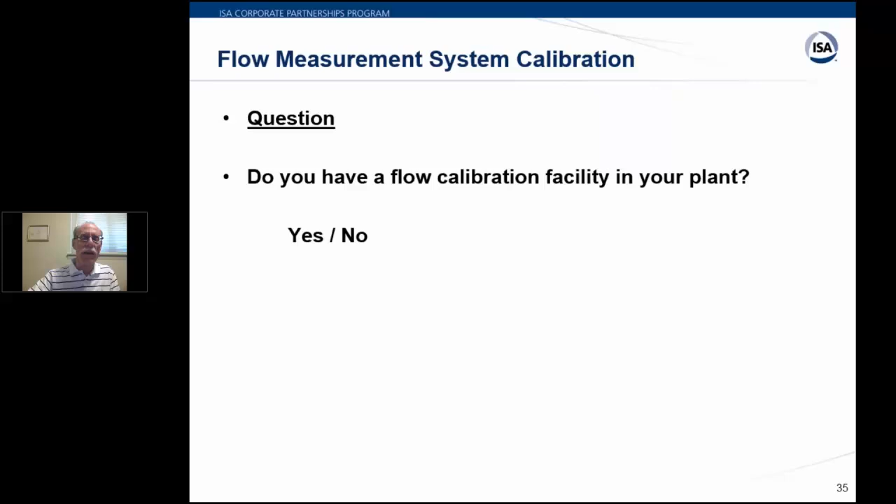And a question, this is kind of interesting, I'm curious to see what the answer is going to be. I have an idea, but do you have a flow calibration facility in your plant?

Like I say, this can be very practical and very useful. We had a case, actually it was my predecessor's case, which kind of precipitated this, where the plant operators would have a problem and would tell the instrument people that the problem was in the flow meter, at the same time they were trying to solve their own problem. So they would distract everybody. As a result, yeah, that's kind of what I expected, the 80-20 again. About 80% of people don't, maybe 20% do have that.

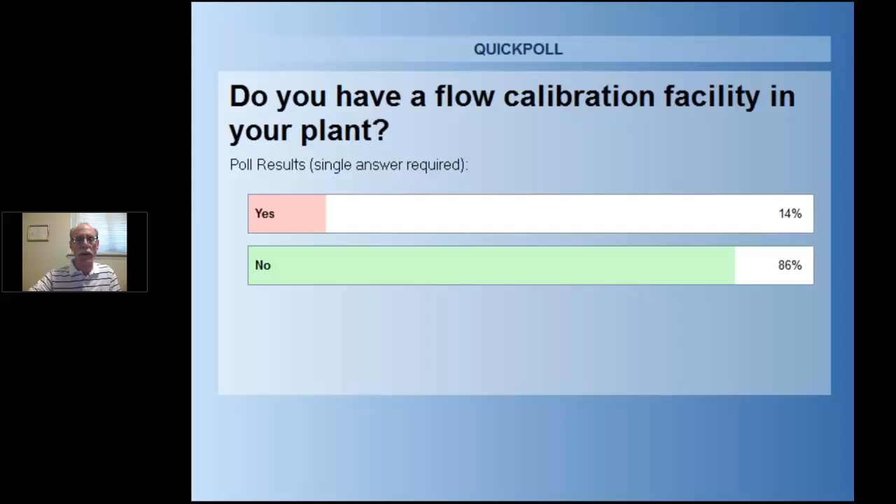My predecessor got tired of sending technicians out to check things, and they'd come out okay, and then miraculously the problem would go away. So what he did is he put in this little flow calibration facility to handle that, and after once, twice, three times, they stopped asking them to go check the calibrations. I think they went and picked on someone else, but I wasn't there, so it is what it is.

Now another way to calibrate systems is a dry calibration. The two calibration methods I just mentioned are wet calibrations, where you actually put the gas or liquid through the meter itself. In this one, it's a dry calibration, where you verify the physical dimensions and also do the electronic stuff that Roy spoke about, where you check the zero, check the span, check up and down, and that sort of thing. There might be a scaling factor, there might be an analog output. These are electronic techniques, and this is another technique that can be used, and most commonly, I guess, it is commonly used.

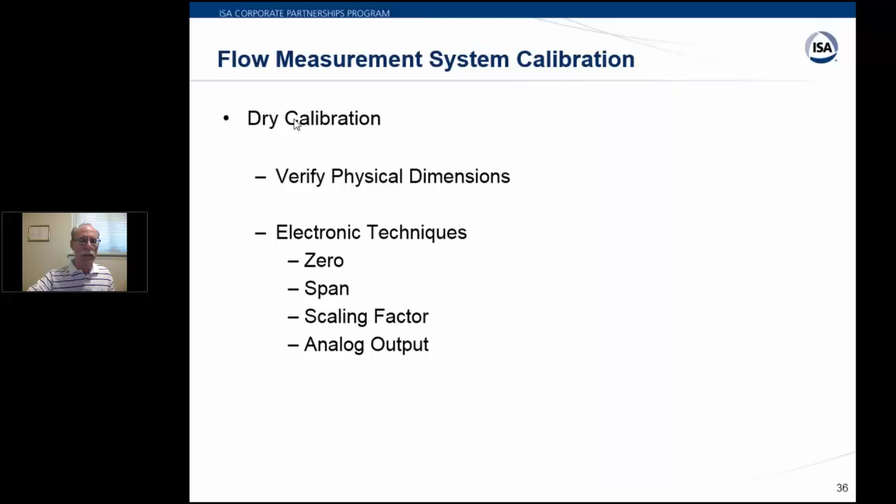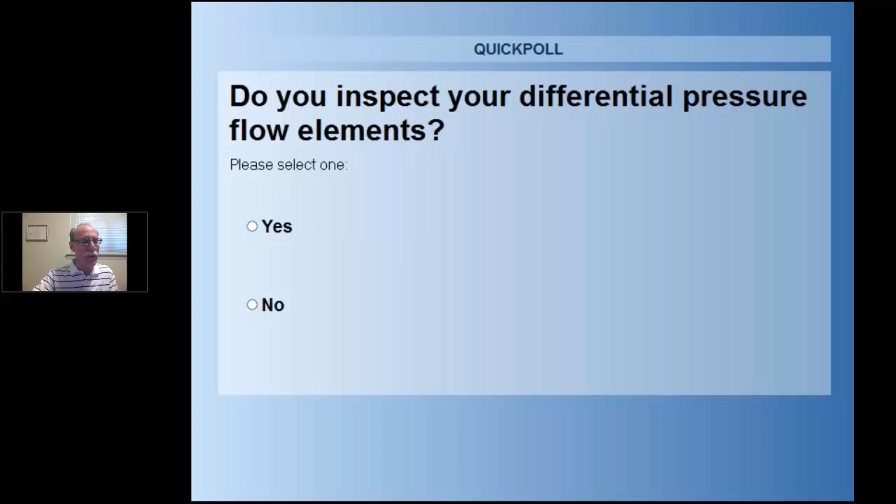Now, do you inspect your differential pressure flow elements? Remember, this is for you guys, so please just put down honestly what you do or don't do. But remember that I said the flow elements are important because they're geometrical type devices, and if the geometry changes, you actually change what the meter does. If you don't inspect them, you could have a problem. Maybe you do, maybe you don't - different services are different.

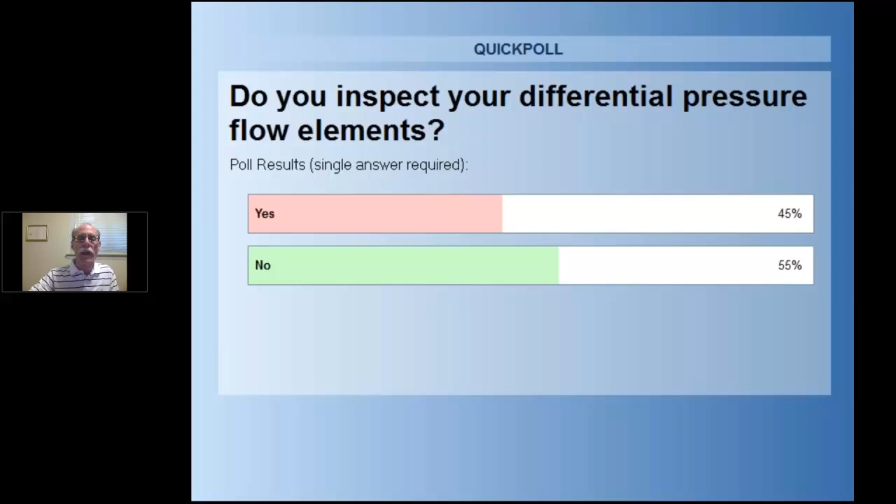Okay, so about half of you inspect these and half of you don't. I suspect that the half that do inspect them probably have something to do with custody transfer or some very important measurements. What I've noticed out in the plant is that typically, we did not inspect them. Even though I knew better, we didn't inspect them as long as we had good product and the operation seemed to be stable. We would not inspect them.

Now, the types of problems you can have if you go in and inspect - well, there are things you can tell from the outside. Installation errors: do you have enough straight run? Is it oriented properly? Is the tubing tubed properly? Is it always sloping in one direction or the other? Is the direction correct? Is there a U? Is there an inverted U? These are all things that you can kind of get from the outside.

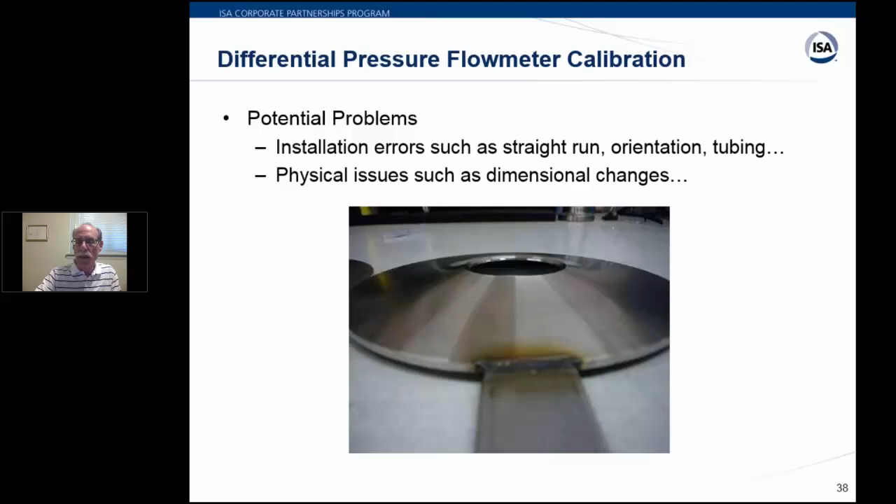But I did do some work in a nuclear power plant some time ago, and they had two different flow meter measurements. One was an orifice plate, and the other was ultrasonic. What I found is they were different - the readings were different by, I believe, around 30%.

By nosing around quite a bit and asking questions and talking to people who had pipes apart - because I couldn't go inside the piping, it was a cooling water line, I couldn't go inside and see what was inside - I was able to find out that there most likely was coating, and from the eyeballs of the people that were in there, they could tell me roughly how much it was. Sure enough, when I put in the calculations with a different diameter, I was able to get the two readings to essentially be close to one another.

They're never going to be perfect, but I got them to be somewhat close to one another so that they knew what the flow was through the pipe. Neither of the meters was correct. Both of them were affected by the inside diameter of the pipe. So these are potential problems. If you don't go in and look, these are the types of things that can occur.

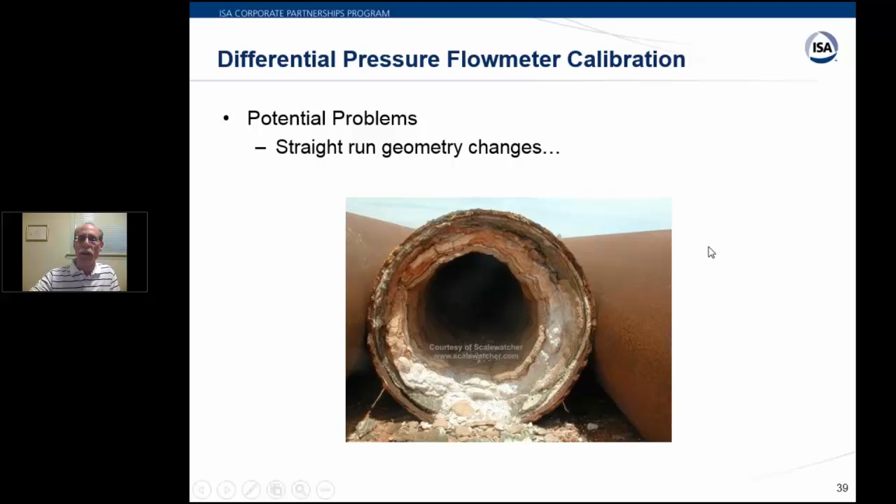So there are things happening inside that you have to think about. And, it is what it is. There's a lot of things to think about.

So anyway, kind of summarizing everything here, coming to some conclusions: there are things you can do. The best thing you can do is ship the flow meter element and the transmitter to a flow calibration lab.

Problem is, it's expensive, it's cumbersome, you have to pull the thing out, and theoretically you have to pull out the upstream and downstream piping as well, or maybe even simulate it at the flow lab, and that all gets expensive and cumbersome to do. So that's a real problem.

The other thing you can do is remove and inspect the flow meter element and calibrate them in a flow calibration facility, basically with a master meter. Most plants, about half of them here, did not have a flow calibration facility, but it's something reasonable to do. You don't necessarily pull all of your meters out, but you pull out the ones that are important. You don't need everything.

Another thing you can do is remove and inspect the flow meter element and calibrate the transmitter. So now you're not really looking at the straight run, you're not taking care of it, you're not doing a wet calibration on the flow meter element, just on the transmitter. But sometimes it can be difficult.

I mentioned the legal case where we had 800-pound steam at 800 degrees Fahrenheit, and it hadn't been out in 45 or 50 years, I forget what it was at the time, and had not been calibrated in 7 years, which is more interesting. So you can do that.

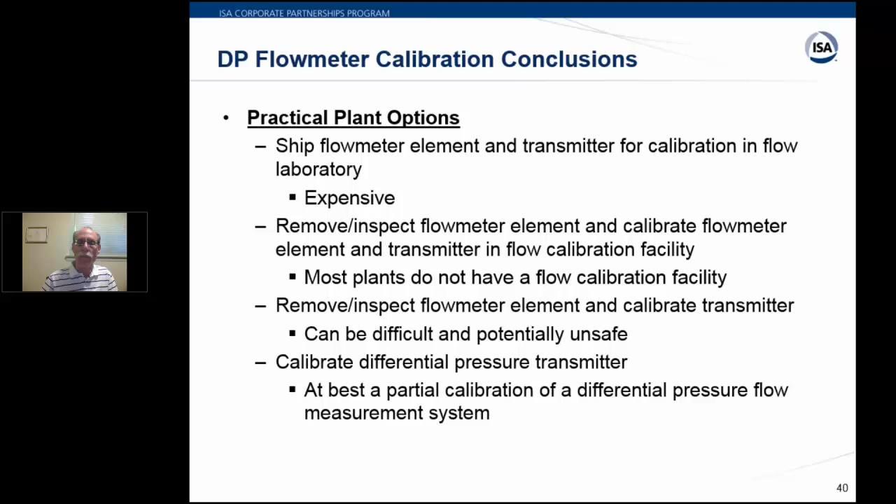So I believe that is the last slide, and I do thank you, and I believe there are other people that are going to take over for me. So, best.